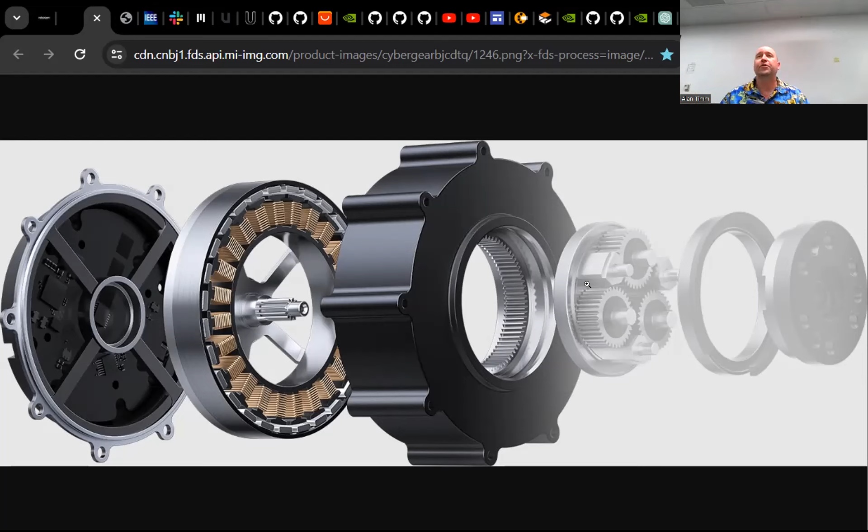The way torque and physics works, the longer your moment, the more force you have. So these wide pancake motors really put it up. And where this all comes together is, when was this written? 2015, 2016. The idea of proprioception, your ability to know what your motor is doing.

With this type of a motor, with this low gear ratio, and you know the position, you can do the change in position for velocity. You can calculate out change in velocity for acceleration, and you can have meaningful estimations of force. And you get all that with this new design.

These new designs also accept 3 different forms of input. With servos, it's just position. So you have motion controllers that break out the deltas between position 1 and position 2 over time and send position information. These new motors can be controlled through the input of position. You can input a velocity, or you could input a torque.

You can also input stiffness and damping as part of the equation. In other words, you have complete control over the behavior of this motor in real time. Plus, you've got temperature out because they tend to overheat. And so, when you're looking at the humanoids and the quadrupeds, this is why they're all using this motor.

This is what's pretty much provided the breakthrough needed for humanoid level robots, scaling up this idea to larger motors for use in humanoids. And they've been used in this quadruped since the MIT Cheetah from 2016.

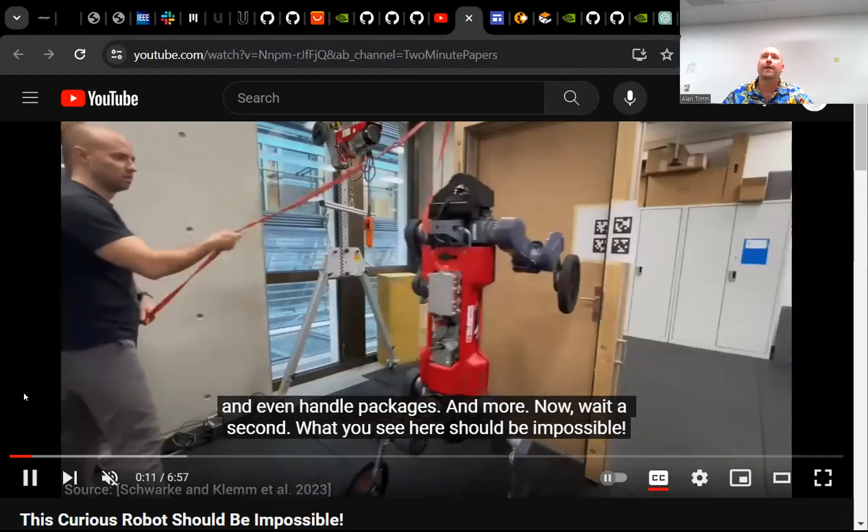Oh my God, that is. Right, so there's one other thing, there's a clip where, right, look at the control theory problem on this. It doesn't even have legs, you have wheels. So

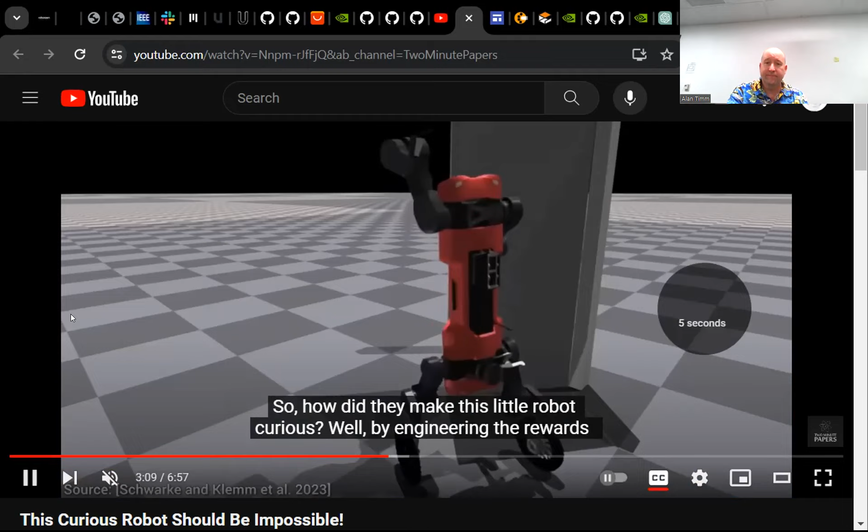This is a rich 6 minutes describing state of the art right now. And that's just defining a reward function, and not just, I mean, there's a lot of stuff that goes into this. But it's reinforcement learning along with, yeah, a virtual lab or something going on. So just to wrap up this portion of wow, through deep reinforcement learning, it has learned how to successfully navigate like this. Wow.

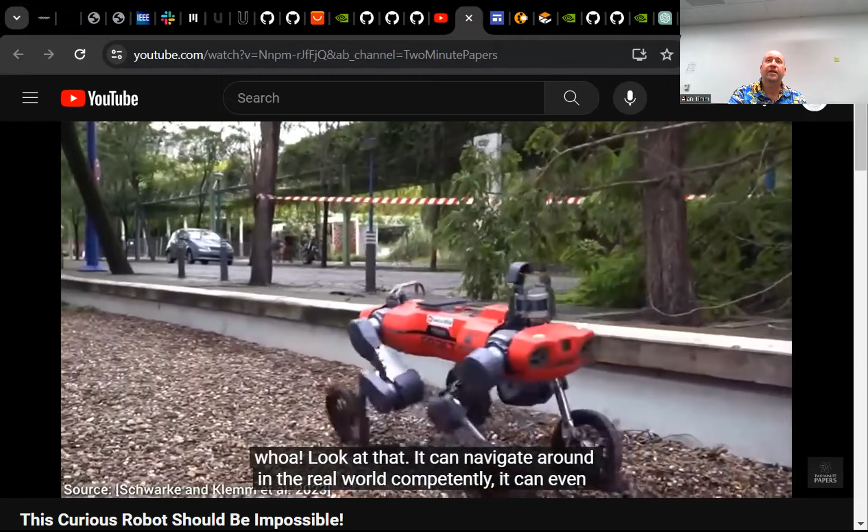Who wants to program that manually? Well, no, and that's the thing, this gets me excited. Now, I'm not going to contribute meaningfully to this area of research, but just to be able to integrate it, take advantage of it, these are the types of things that are getting me really excited about robotics right now. Yeah, if the hardware is there, the difficult software problem has a new solution.

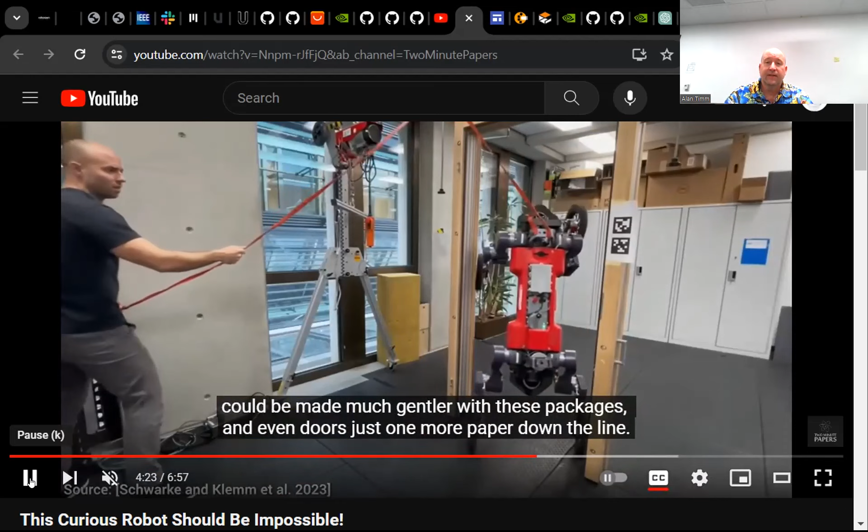Yeah, and we've all programmed advanced robotic solutions to stuff, right? And we're all painfully aware of how brittle and fragile the solutions and the components are. Crap, it could hear me just fine at home, but now here, or it could see the goal just fine at home, but under fluorescent lighting. And oh shoot, it was able to navigate just fine at home on my plush carpet, but on the short carpet here, right? This approach provides far more robust solutioning.

And I don't even know how to describe the control theory required for a two-wheel balancing bipedal robot to pick up a box and put it somewhere, right? Then one of the main things they have to do is properly model the device in the simulator, right? Exactly. And then they have to throw things at it in the simulator to get it to learn this, right? Yeah. And that has to be done thousands or a million times in the simulator. Then it comes out with its black box control system.

Yeah, exactly. So they're getting meaningful results with this right now with the tools that are available right now. I said, you know what, that sounds like fun. I'd like to see if I can get my hands dirty. But this, believe it or not, isn't even state of the art anymore. We had a couple of posts, I think last week or the week before. That's unfortunate. Okay.

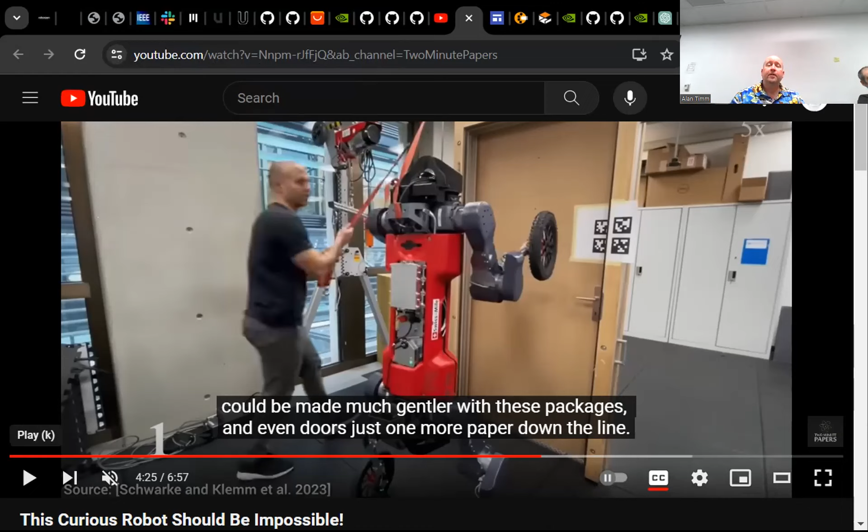The Mobile ALOHA folks just recently released a whole bunch of videos. I don't have a visual on this, so we'll just switch back to my DreamBot. They built a mobile manipulator platform with 2 arms. And they teleoperated it to do a whole bunch of tasks, hours and hours of video and recorded telemetry data for pick up a glass, put down a glass, open the dishwasher, all this stuff. They then fed that video and telemetry data into a deep learning network.

And the end result is that this robot can do far better, it's not perfect, but far better than any previous approaches. I have news clippings and articles from the 70s talking about robots that can do your dishes and mow the lawn, and even from the 60s and 50s. And we all knew they were blowing smoke. This robot is doing it. It's not perfect, but it is cooking. It is grabbing the dishes, it's filling the dishwasher through a neural approach to training through teleoperation and video, right?

And then just last week, the Figure One folks, one of the dozen humanoid robot startups that are going to have a product offered, trained their Figure One robot to make coffee by watching videos about how to make coffee. So no longer recording hours of teleoperation. And I think the Optimus folks discovered the same thing. The way I heard it described by experts in the field was, at some point someone tried it almost as a joke, and they were so surprised about how well it worked.

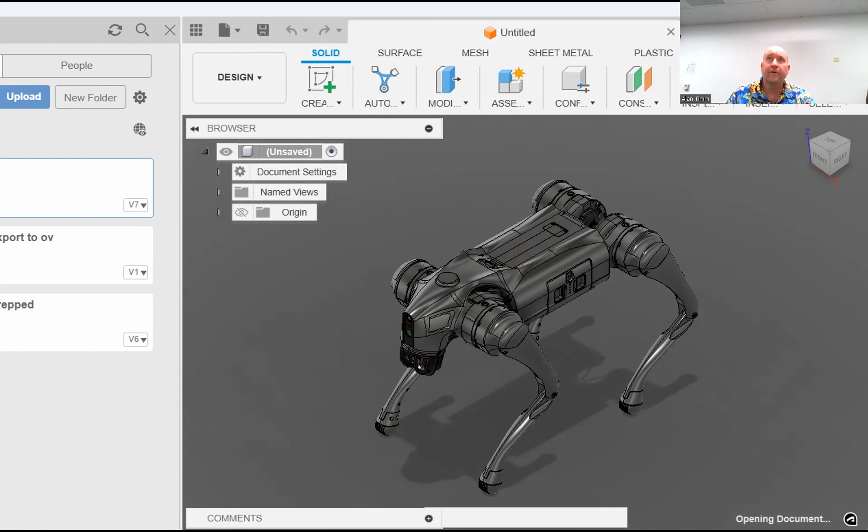See, I'm trying to keep the portion of my screen short enough that maybe we can go a little bit farther.

So I brought the robot in, and I spent a fair amount of time. Well, at first I divided that up into bodies and assemblies, and then none of that exported correctly. So I brought the model in. I used Fusion 360 to correct a couple of bodies that were non-manifold, meaning that the export from whatever their source system is into STEP wasn't complete. There's about 10 of those that I fixed. And then right from here, you have an option of exporting as USD.

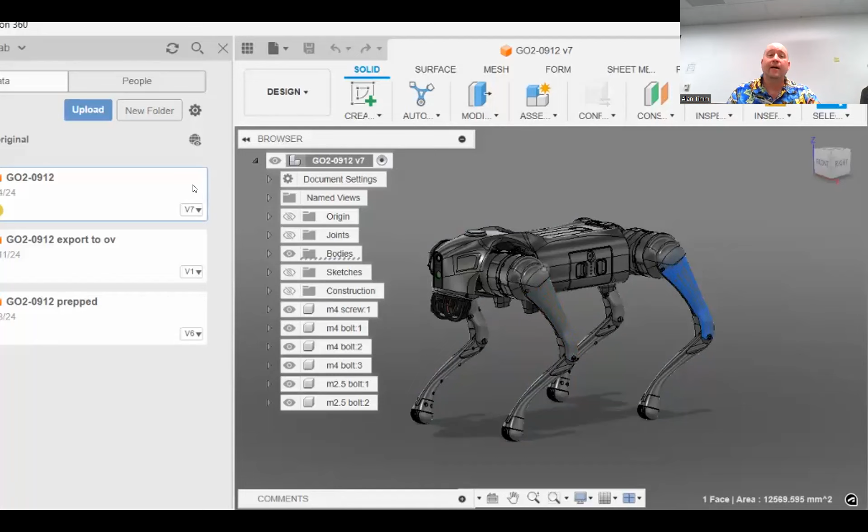So I've gone through this process probably 5 times, not because I'm a glutton for punishment, I'm just not smart enough to get it right the first time. But there were some very important things that I had to do. The STEP file describes the relative position of each of these pieces or bodies from the whole, right? So there's no articulations, there's no relationship. If you open up the bodies panel, you've just got like 150 individual bodies that aren't labeled.

And when you bring it into Isaac in Omniverse, it brings it in basically the same way. You have to define where the joints are when doing it this way. Now, that being said, not that one.

One of the packages that they integrate really well with, I'm logged in on the wrong one, is Onshape. We've talked about Onshape in years past. It's an online only 3D modeler. I happen to think it's super, super cool, but unless you pay a lot more money than I can afford to keep it going, all of your projects are public, which is kind of a deal breaker for some people.

But they have an Onshape connector into Omniverse, such that you can bring the model in, and you can define the joints and assemblies in Onshape, and then it imports much more cleanly as a finished robot into Omniverse. And I'm not an Onshape guy, so I did everything the hard way. But at some point, I'll probably try that workflow, because it's very well integrated, and you don't have to do any of the things that I'm going to have to show you right now.

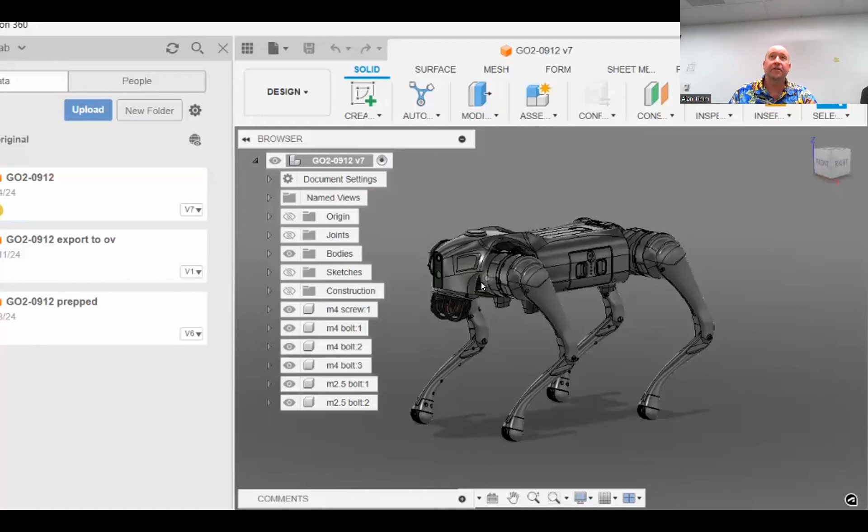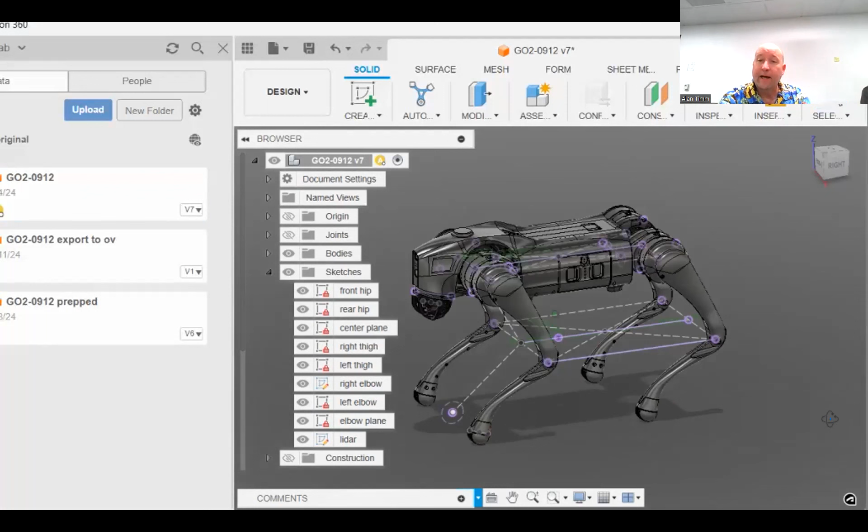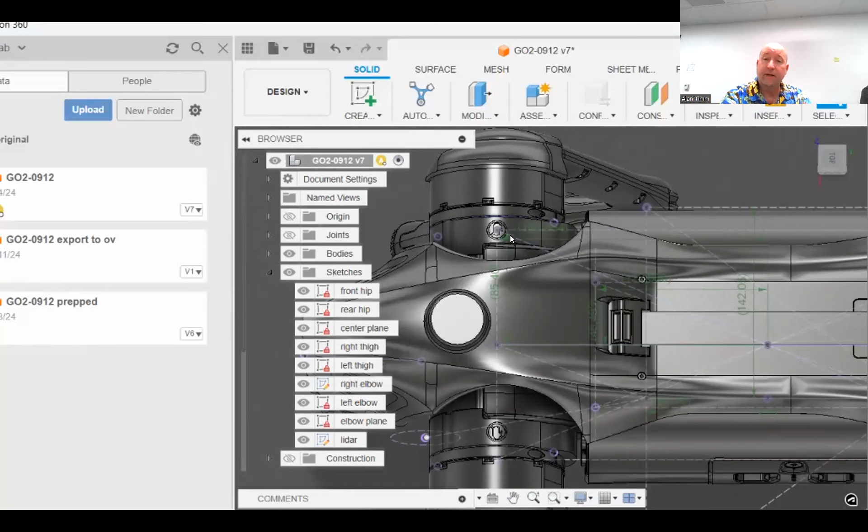So if you have to define the locations of the joints between each of the pieces, you have to know where they are, which means you have to start creating sketches to define the locations in 3D space. So I did that. I defined a common origin for the center of the robot, and then I set up a series of sketches to understand the location of the hip joint in 3D space, a suitable location for the thigh one in 3D space.

Same thing for the location of the calf or the elbow joint. So when you open up these sketches, there's measurements that tell you exactly how far down and over and out that you place the joints. The angle of the LiDAR, which is 15 degrees, modeling the location for the LiDAR in 3D space, as well as the angle of the legs.

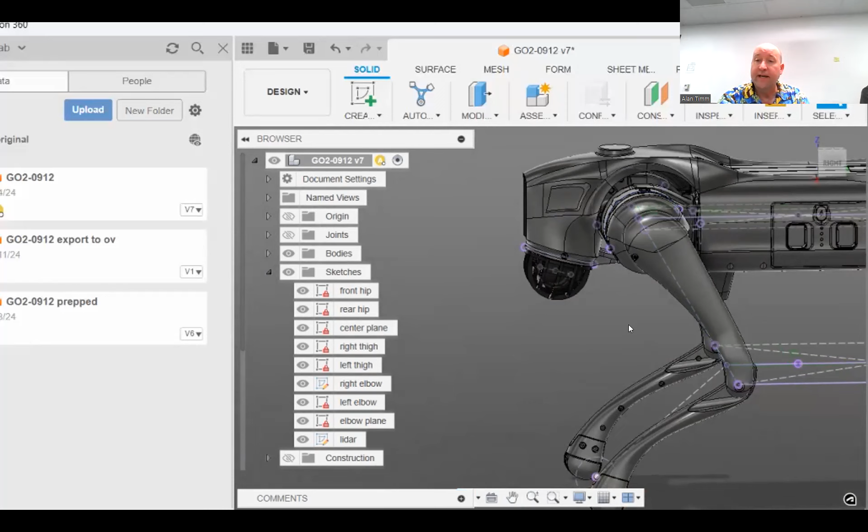Let's talk about the legs for a second. If you haven't had the pleasure of designing robot arms and legs and simulated control, there are a couple of things that you have to decide on. And one of them is when you're describing the angle for, we'll call this the thigh or the shoulder joint right now, what angle represents your zero position, right?

Now, one of the things that I've personally gotten used to is that if the leg is dangling straight down, I've defined robots where that becomes the 0-degree position. So that means maybe positive degrees is forward and negative degrees is back. Up to a point, it's arbitrary. Or maybe you define the 0 position as parallel, from 0 to 180, right? You just have to decide.

Now, in this case, I am positive that the native rendering of this leg should not be the 0-degree angle. So I created a quick sketch to find the exact angle from horizontal so that I can program it in the bot, right?

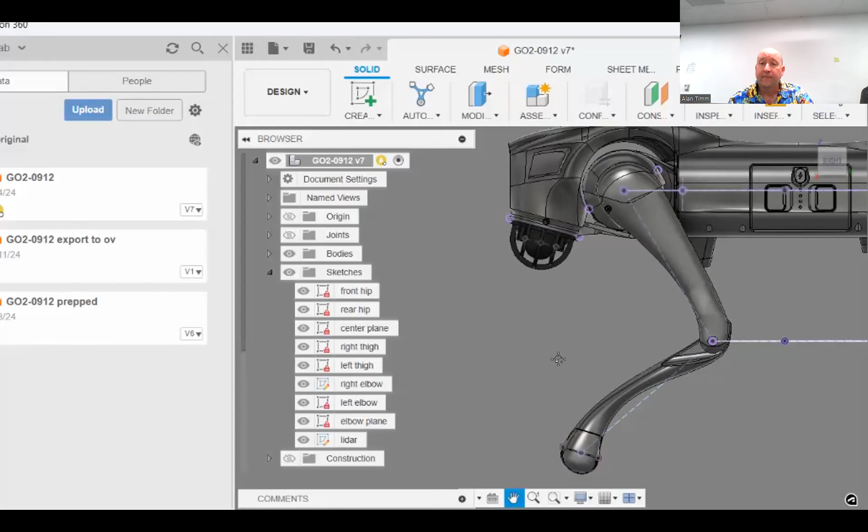The next angle is the one for the foot. And so far, my angles for here and for there, they agree with the manufacturer's URDF model for 0 degrees and whatever their neutral is. The part where we disagree is how you define the 0 angle for the lower leg.

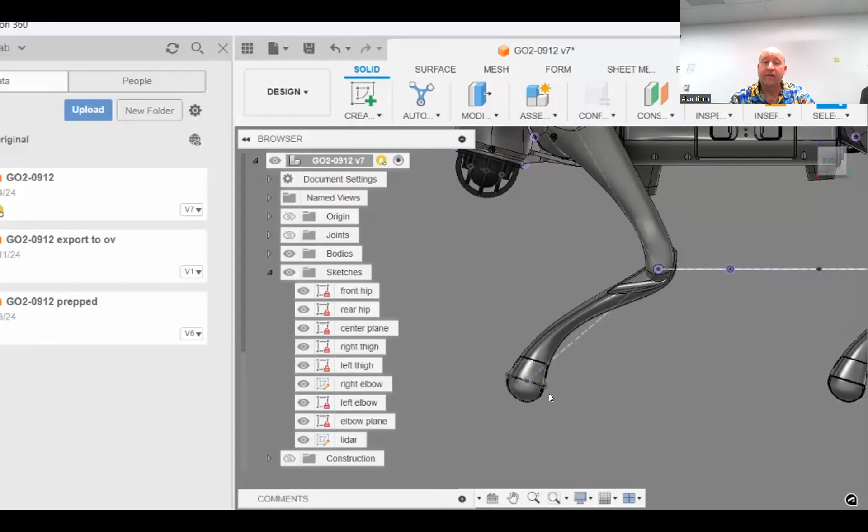Now, when I look at the lower leg, I want to keep things simple. So I want to know where the center of it is. And in modeling and simulation, I probably want to simplify this a little bit. This isn't a perfect sphere. I would probably simplify this as being a perfect sphere of some diameter. And then that would mean that the 0 position for me would be when it's dangling straight down. It turns out that the Unitree folks didn't define it that way, and I'll show you how they define 0 when I bring it to the model in a few seconds.

So these are some of the things you have to keep in mind. Now, when working with a real physical robot, really you could write a translator to go between anyone. It's all arbitrary, right? But it would be important for me to know how the physical robot defines the 0 angle. And so I can either go off of their URDF file or off the physical robot. You probably want to make your simulated robot have the same 0. And I'll show you how you can do that in a second.

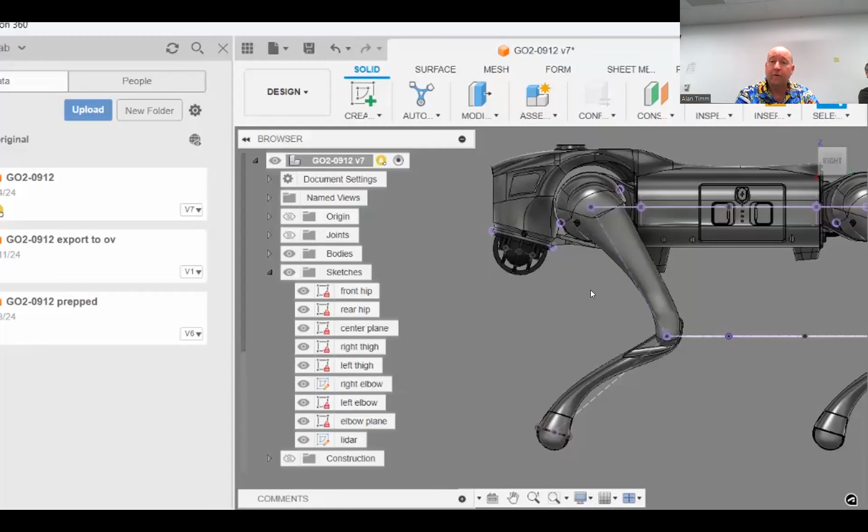So I've got the robot in here. I've defined a whole bunch of sketches, exported it to the USD. I can refer back to here to get the exact angles and the exact joints.

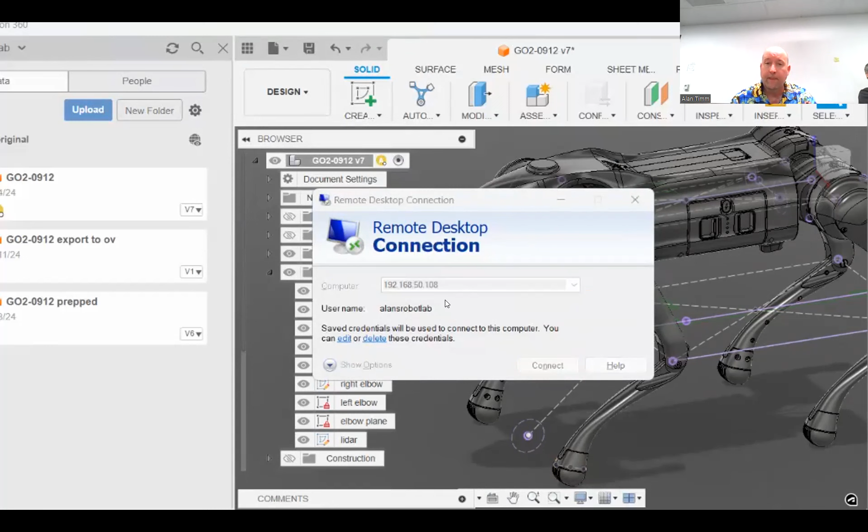Let's move over to Omniverse, which I got logged out of. That's unfortunate. Okay, we're still on our VPN. There we go. Good. All right. Let's see.

All right, so what we're doing right now is through VPN, I'm logging into my work desktop in Linux using remote desktop. GNOME remote desktop to be able to control it. It's very performant over most connections, which is super cool.

Let's take a look at their Go1. All right, so this is one of the models that they give you access to as their examples. And so if we look at the center of rotation for the thigh, we can see that we agree that that's a rest position. The part that I was confused by is their leg. So if we zoom in here, here is their pivot for the elbow, and here's where the pivot would be for the foot.

I don't know which line that they set up. It doesn't make sense to me why, and their URDF file for the Go2 looks the same way. How they derive defining this as the 0 position. So when I get closer to an actual robot, I might have to make some adjustments. But

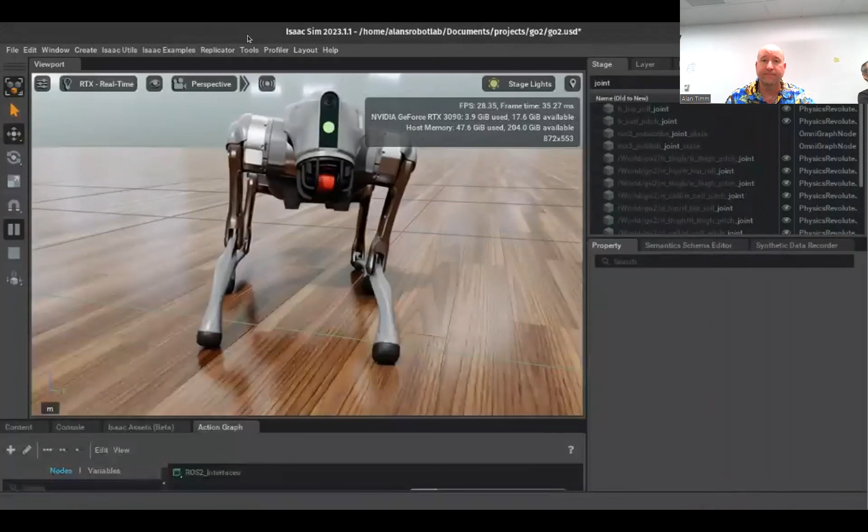Okay. So here's my robot. Now in the action graph, I subscribe to the joint command. I also publish the joint state. I publish the camera, right? So here's all the hardware except for the lamp input. I even published the laser scan, and I published the IMU, and I published the transform tree, but you can't use that for the robot, right?

So from an interface standpoint, these aren't the standard Unitree interfaces, but you have a ROS interface to every part of the dog you want to control. We had a talk, I want to say 2 years ago, from the Foxglove folks. And I quipped that this is the future of ROS 2 RViz. This is their version of RViz. It's a free download, and it is superior to the RViz robot visualizer in every way. The least of which it supports a dark mode.

But you have the same concept of panels. You can review the joint states, joint commands. It's taking in IMU and pose data into the scene. Because my bespoke Go2 isn't articulated with the same object origins as the URDF file, the URDF visualization doesn't work right now. But that's just the way I set up my robot, but the transform data is being sent. And here's what the robot's seeing out of its front camera right now.

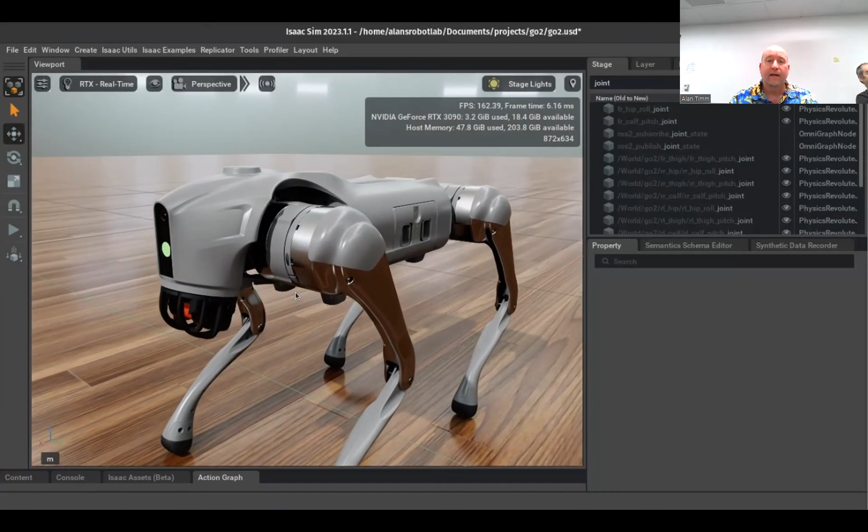But no, here, I'll show you what the hang up is. When you bring in the robot, let's turn it on for a second. When you bring in the robot, every body, every piece of it that is in the robot has a body origin, right? So where is 0,0,0? Now the challenge with the STEP model is that even though your leg is over here, the origin for that joint is 0,0,0. The URDF model isn't set up like that.

And so what happens is that because they have different link origins, when you bring it into Foxglove and you turn everything on, the transform doesn't refer to changes in joints, it refers to changes in position for the links. And the changes for the positions of the links, because of different origin, are totally different. Yeah, so at some point what I might do is bring it into Onshape just to do the URDF export, so that they have the same joint origin, at which point the link transforms map, and then start putting some lamps and desks and chairs in there just to see the LiDAR image on it.

Wait, so you have to export a separate URDF that's compatible with this? Exactly. Then your Isaac Sim has its own. Yep, and that's one of the gripes right now, or a possibility for future enhancement. They've been talking about it: the export to URDF is a one-way street, right? So you export to Isaac, you export to URDF, and never between. You need both. So if you make a change, you've got to review them both, and they're looking to see if there's a way to tie them together such that you don't have to maintain two different copies of the robot.

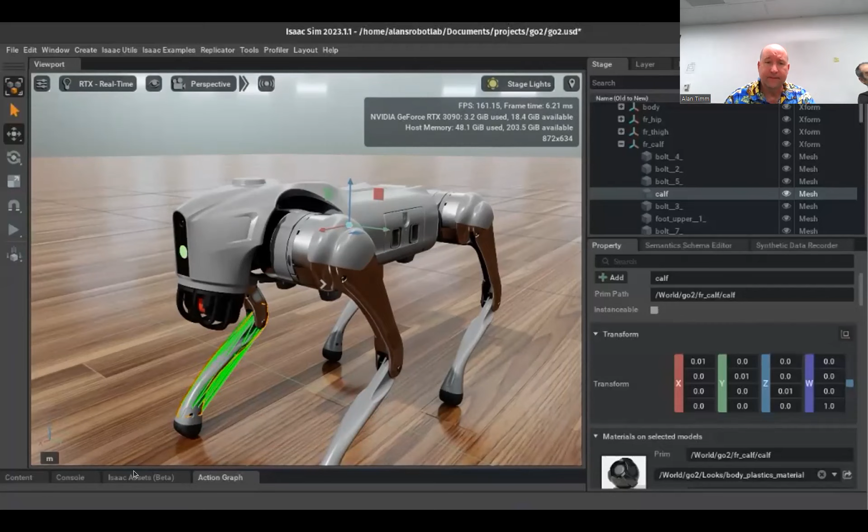That's because these things came from different origins. Their Isaac, because mine's off of their STEP file, and their URDF was built differently. Oh, I see. So if you start a brand new robot, you could define them with the same origins and all that. Oh, yeah. Alright, that's sort of more of the administrative side. It's a specific case situation.

And so as an example, here is importing their Go2 URDF file using the Isaac Utilities URDF importer. So it's built in as a first-class importer. When you bring in their URDF file, this is what you get. And it's a good model. And so if I were to work with this one and make the joint names match the publisher, and then match this up with the native URDF file in Foxglove, everything would work. Even the physics would work okay.

And you remember we were talking about collision objects, or simplifying the model for the purposes of collision physics. Here is what the collision meshes look like for their Go2. So as you can see, it's a much simpler model. So running the calculations on this is much simpler. And when you run the simulator, you'll see it runs at like 50 or 60 FPS, where I'm getting like 25 or 30. And that's the benefit of simplifying your model from a physics perspective.

Wait, so Isaac Sim can import the URDF? Oh, yeah. And display it. So you could have gone that way completely. Then it would have been compatible out of the box, and the whole process takes like a minute. Why did I spend several weeks doing it the hard way? You're taking advantage of it, it looks better. You're taking advantage of the more sophisticated Isaac Sim. So I never said I was smart, but I will tell you I'm determined.

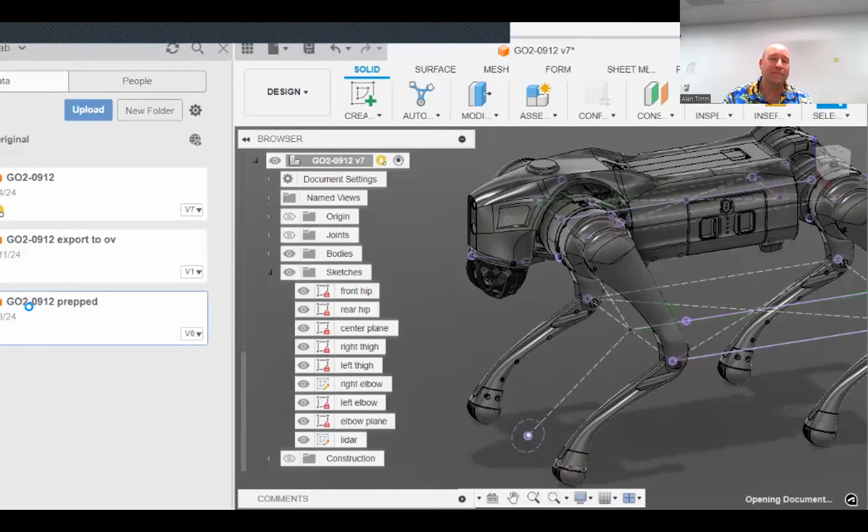Yep. So, here's the one that I exported. Here's the one that I prepped. That I painstakingly added in and made joints for all of the screws that I could find, by using the McMaster-Carr interface to figure out these are probably M4, these are probably M2.5. All right, I shouldn't have asked. Oh, yeah. Well, okay, and this probably explains really well why I spent 2 weeks importing a step file, as an OCD perfectionist.

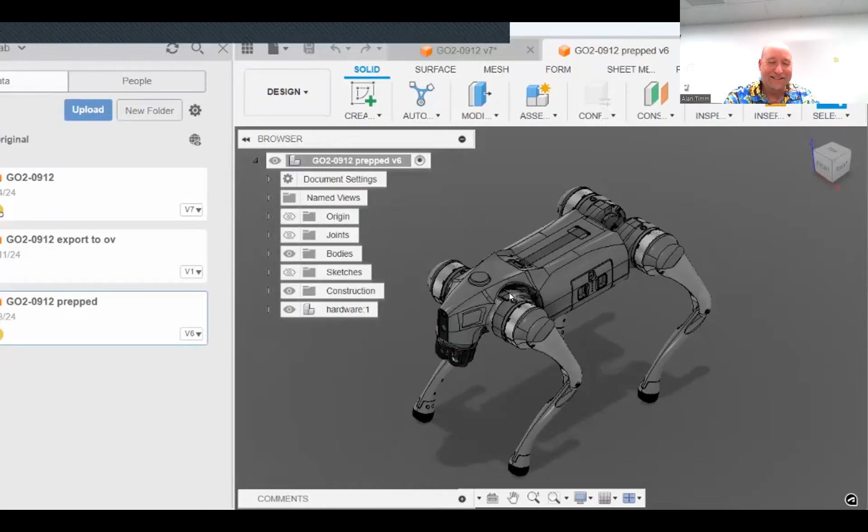That was a step file versus... Yeah. The step file came from a OneDrive link that the Unitree folks have been passing around that someone added to the hacker group. So I'm not 100% supposed to have it. That's why I stopped short of publishing anything.

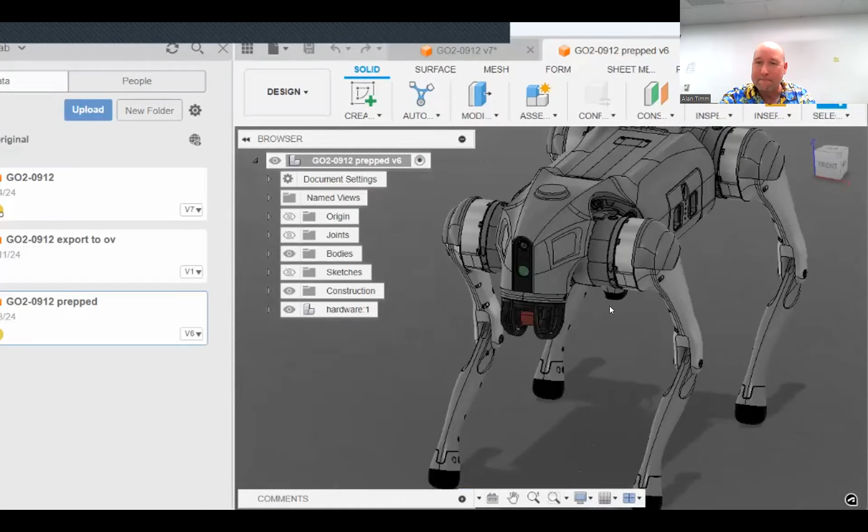But the step, it's a model file format. Is that what step is? Yeah. So it's by contour, so it's a far richer format than when you export to facets for 3D printing. Oh, so it's curves. Curves, yeah. I added in all of the screws for all of the motors. I added in the screws for the bolts.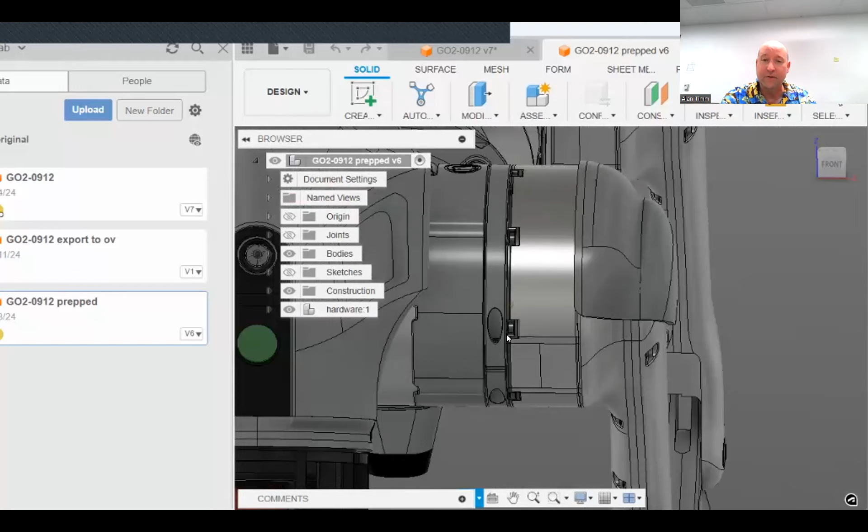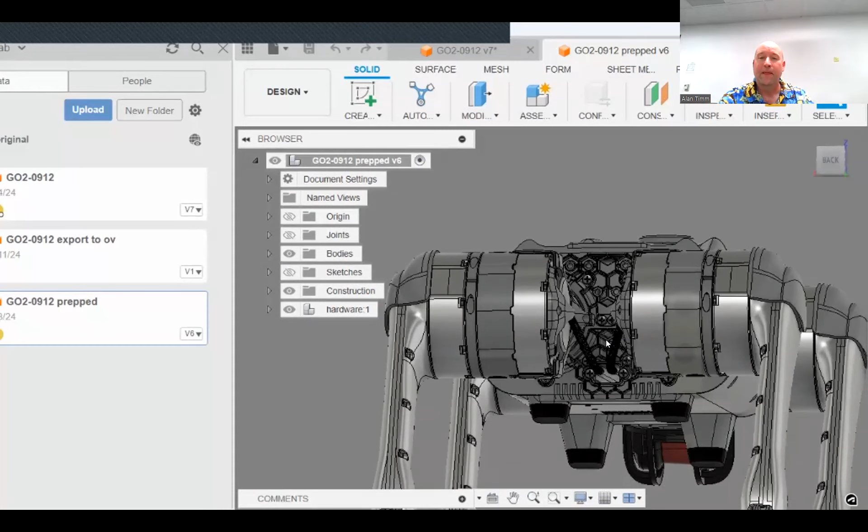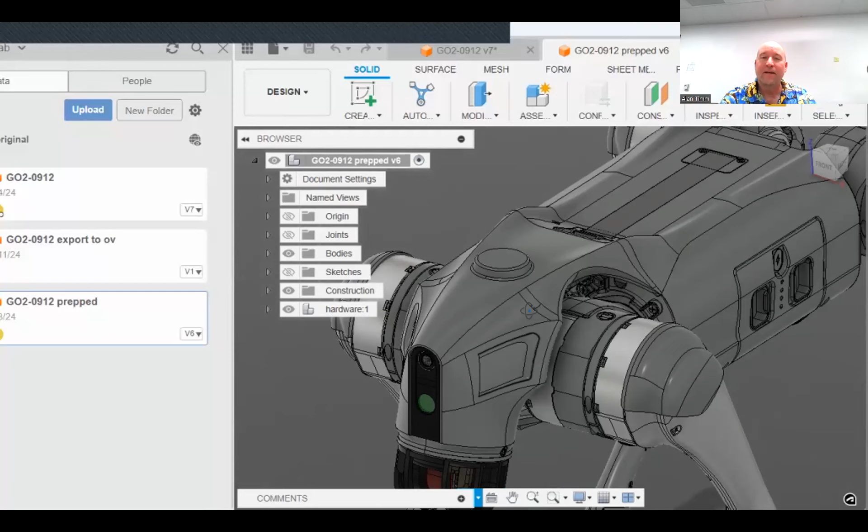Let's check out the butt for a minute. I added in all the screws for the top. I added in the screws that were missing here. Because if you're going to do it, do it with style. But the way that I imported it into Omniverse, there was another setting that someone showed me later involving joint origin. All 150 screws rendered in Omniverse to position 0,0,0. So it's not worth it. Not worth it, but yeah. So I'll probably try again because it makes it look a little bit better. But yeah, even without a two-way workflow, it's just a joy to work with.

Are you going to share all of your work with the community? Yeah. So here's the way that I'll word it, because I'm not 100% sure that the step file was supposed to be distributed. If this excites you and you want to get in on it, let me know and I'll get you a copy. I'll share my USD scene. I'll share that, whatever you want. And just like I did with my InMoov back in the day, chances are all of this is going to work out and we're going to have a physical robot within the next X number of months.

And if this excites you and you develop something interesting with the simulator, let me know and we'll run it on the dog. I mean, there's no reason this has to be a solo thing. And your cost to entry to developing for this is just a desktop or a laptop with a recent RTX graphics card on it, which I think is pretty cool.

What is your simulator goal? What's your tipping point when you go and you order the robot? So when I get it to stand up, when I get it to walk, when I get it to explore? Okay, yeah, that's a good question, and hopefully I stick to it. There's two criteria. Criteria one, the main clear and present one, is these smart dudes need to be able to crack the Go2 firmware to enable programming on any level of the dog.

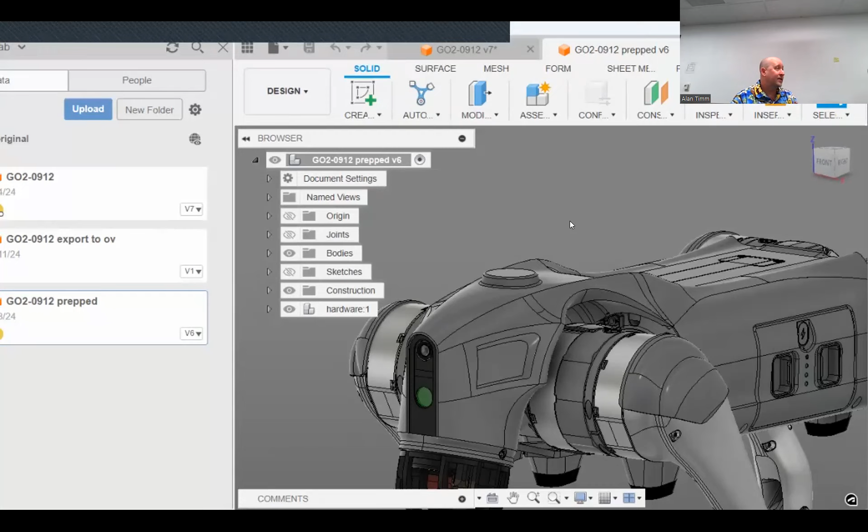And just earlier this year, someone posted a video, a graduate student that had a Go1 EDU, and she wanted to get it walking around further. And this gal is way smarter than I would ever be, and it's a 20-minute clip, and it's tough. At the end of it, she can kind of get it to walk. Now, as fun as that would be, I want to leverage other people's hard work as a starting point. So integrating that CHAMP framework will probably work for me.

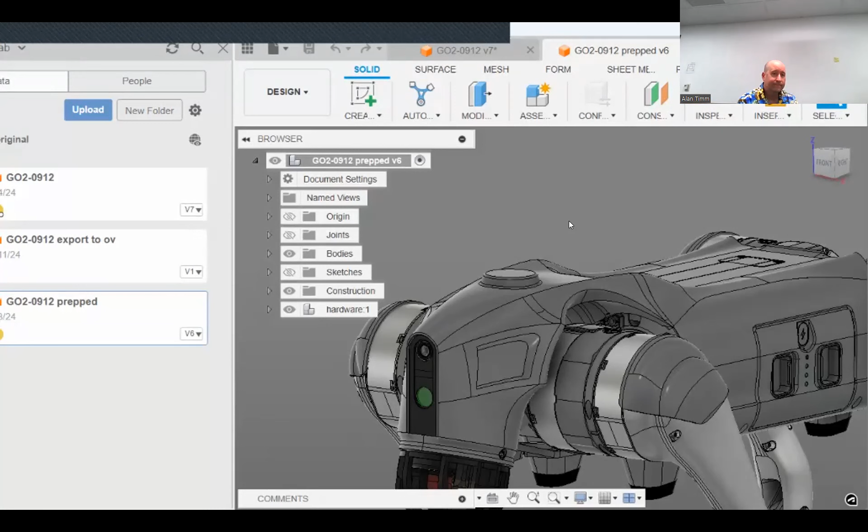You see, that's the coolest thing about it. That's one of the most motivational reasons to get real hardware this soon, because of the CHAMP and the Cheetah code base, right? You hear Chris Alberts talking about that a lot on our forum: without that code, you're looking at a lot of difficult development, graduate level, or just hard coded. But with that code, you really have a shot at doing something in a hobby level time frame, right? Yeah.

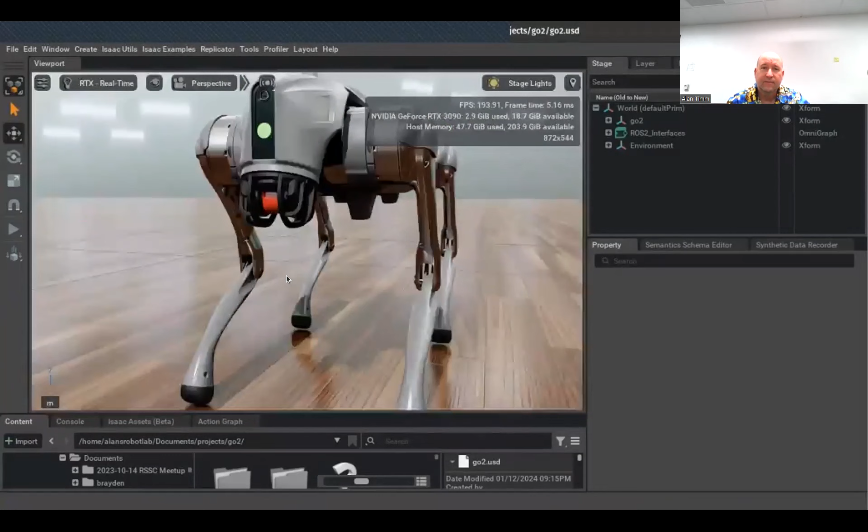Dr. Bruce said it best a couple of years ago. Most of us, we're not researchers, we're integrators, right? Yeah. And I love that. The fact that the Cheetah code's MIT license, the fact that Omniverse Isaac Sim is a free download. To quote Two Minute Papers, what a time to be alive. You don't have to be in MIT or CMU or some research lab to be able to do something in a simulator and maybe even real hardware if you can afford that.

Yeah, so that's all I got this month. I'm excited to see where this takes us next month. Awesome, really cool. All right, thanks. Wow, Alan. Thank you. He spent his break doing that. I was seeing relatives and driving to Monterey. I wish I had more robot time, but family intervened.

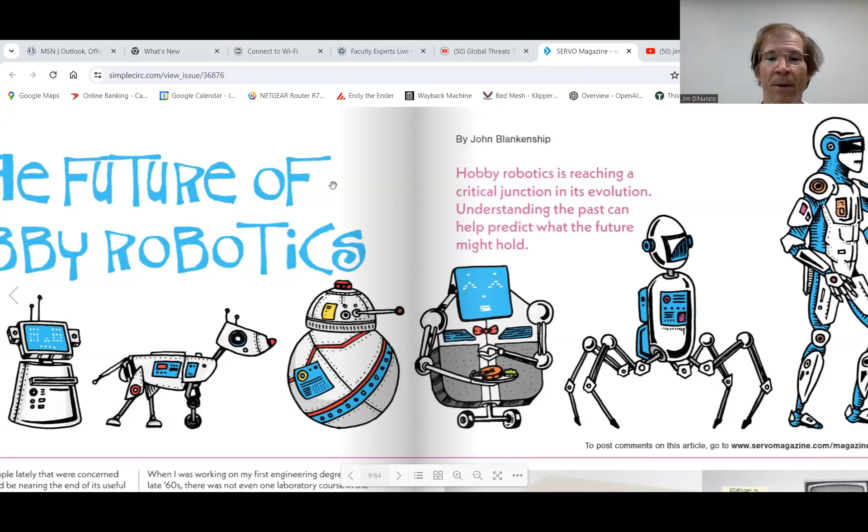All right, thanks. Well, first I wanted to just share this article. It is in Servo magazine, and it's behind a paywall, but maybe at least I can show you this, and if you do subscribe, you'll have access to it. Maybe I can copy some of the text over, but it's interesting because it's about the future of hobby robotics,

and they're talking about an inflection point, or a critical junction in its evolution, because you'll see here, we were just discussing vintage computers. There's the KIM right there, and they're talking about the Altair, and then on the next page is the Apple II. This was my progenitor here.